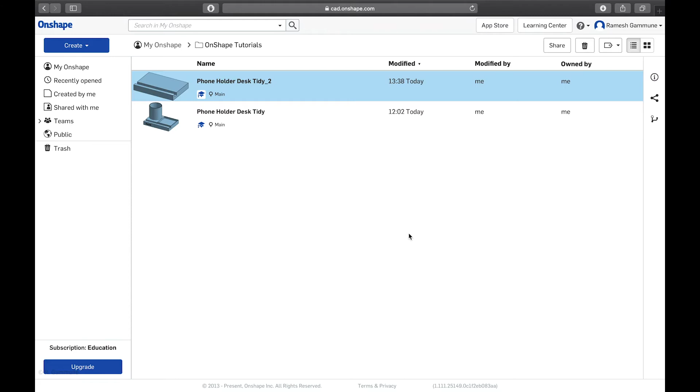Hey guys, welcome to the fourth video on our Onshape Basics series and the second video on the phone holder desk tidy thing. Excuse any background noise, there's a massive storm outside. So last time we made the basic base shape and did a cut. Today we are going to focus on this cutout for paper clips, erasers, USB sticks, or whatever.

We're going to start off by doing a construction line down the middle of this area, and we are going to use a center point rectangle to get that shape. Essentially, it's going to be a 75 mil long one, offset by 2 mil on either end. Okay, let's get that started, shall we?

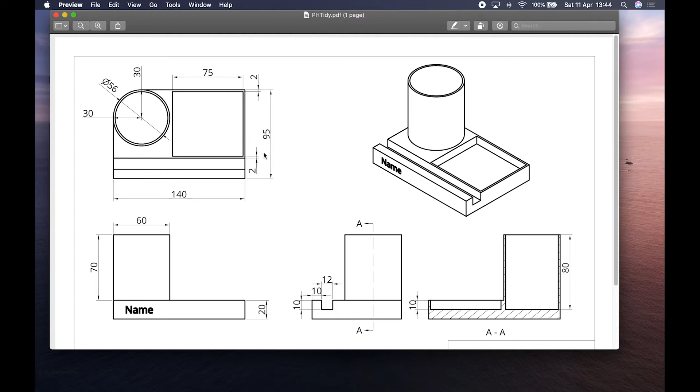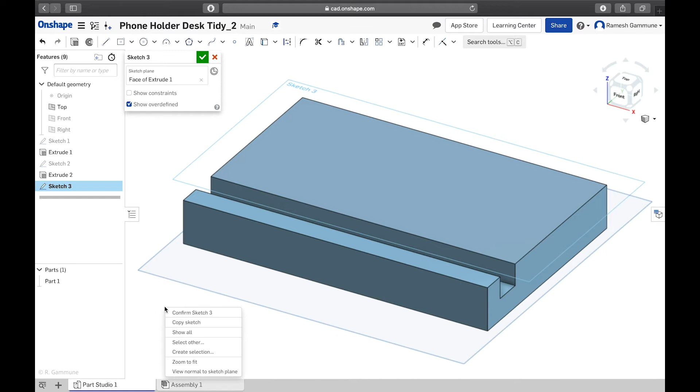So I'm going to go ahead and open my model from the last video. Here we are. We're going to base the sketch off the top surface, not the top plane, the top surface of our model. So sketch, select the sketch plane. There we go. Right click, view normal to sketch plane.

Now I want you to notice that if I highlight this edge here, you can see this dot. That dot is the midpoint of this line, the one that's highlighted. Because we're going to use a center point rectangle, we are going to draw a line off of that in this direction and expand it and dimension it like so. That line has to be a construction line because we don't want our extrude function to recognize it - we just want this for our benefit only.

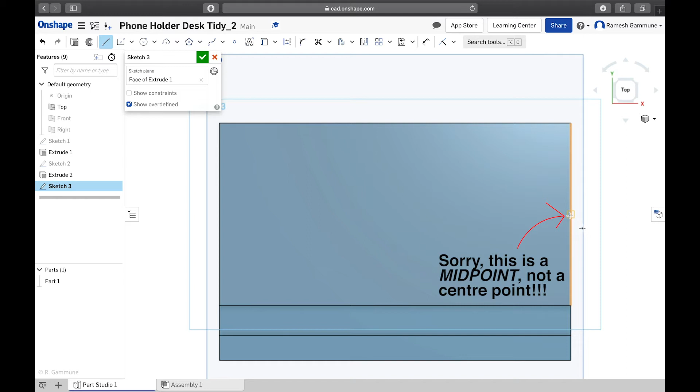So I'm going to go ahead and select line, which is next to the center point rectangle or rectangle, whatever you've used last, and hover it over that edge until we get that box around the midpoint and this little line dot icon. I'm going to click, and if I just move it, you'll see that it snaps to the horizontal, and when it does that, there's another horizontal line below it. So I'm gonna make it about that long, hit escape and get off it.

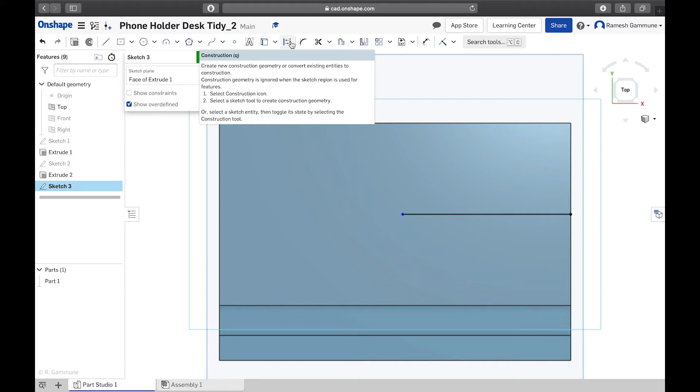Now you're going to go up here next to that letter A. You're going to see another project one, and next to that you've got this straight line with two arrows pointing to and from a dotted line. That is your construction line. Read the text box that comes up, but we want to essentially convert this into a construction line. So I'm going to click the line first and then click construction, and you can see that it just broke it up into a dotted line. Now to get out of this, you actually have to just click somewhere else. There we go, that's our construction line.

Now you can see that this dot over here is blue, which means it's not defined, so we can click and drag that around. Let's make it about that long, and click the blue dot, go up to here - these are our sort of limits. We can lock our points up in space, more or less, so I'm going to go ahead and click fix. That'll convert this to a black dot, and you'll see that you can't move it anymore. Right, that's the first thing.

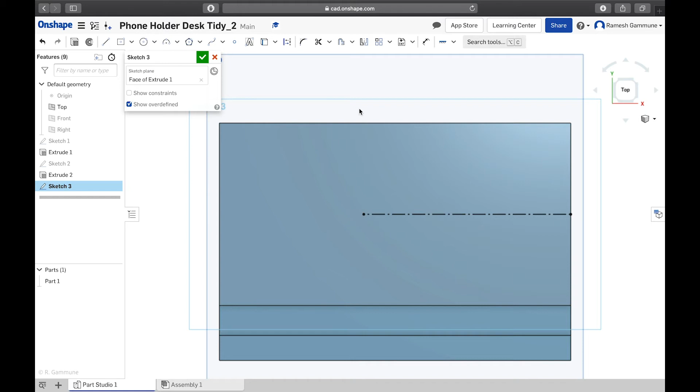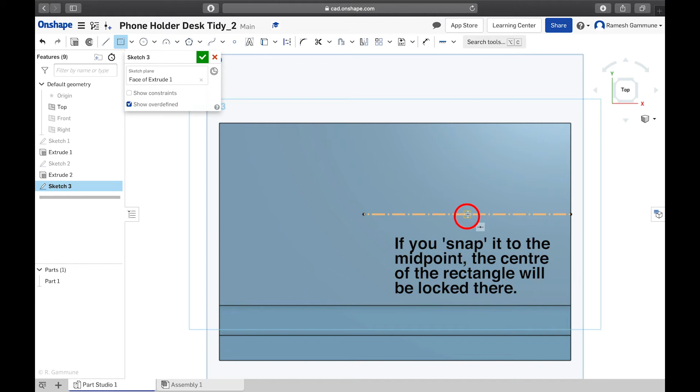Now the next thing I want to do is to make this rectangle. So you're going to use the center point rectangle, and I'm going to base the center along this line, but not on the center of that line - if you click it there, it's gonna constrain it, so you can't move it anywhere after that. So I'm just gonna move it around maybe here, just draw a basic box, whatever shape and size, doesn't matter. Escape to get out of that, and now let's define it.

So we've got 2 mil from that top edge and 2 mil from the bottom edge, and one side's given as a 75 mil length. Let's do the length first. I'm going to click on our dimension tool that we learned in the last video, long end, and 75, enter. Okay.

Before I do anything else, I'm going to move this rectangle to the inside, so that if I dimension that at 2 mil, it's not going to do 2 mil on the outside. It'll make sense in a bit. So I'm going to do this 2 mil over here, 2 millimeters up there, enter. Don't need to worry about the bottom one here because it's a center point rectangle, which means that distance is equal to that always, so it doesn't matter. And here is 2 millimeters as well.

There we go. Now you can see that entire rectangle is black, which means it's defined. That thing is not moving anywhere. Okay, go ahead and get out of the sketch.

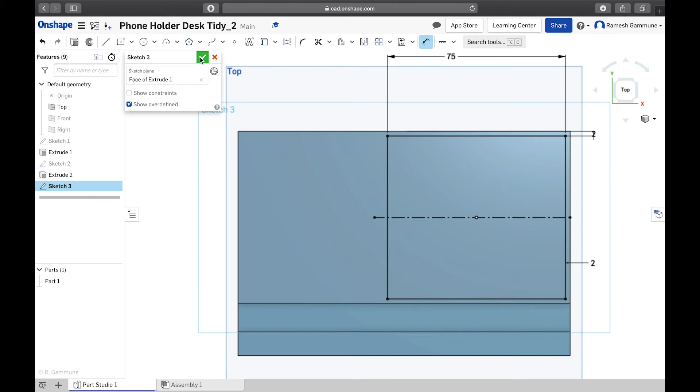So as you can see, we can't really split this into two because there's a construction line there, and that's not going to be recognized by our 3D functions. So we have to extrude this down, cut it down to a depth of 10 mil. So extrude, click, change the direction, remove, 10 mil, enter. There you go. Done. So that's that for now.

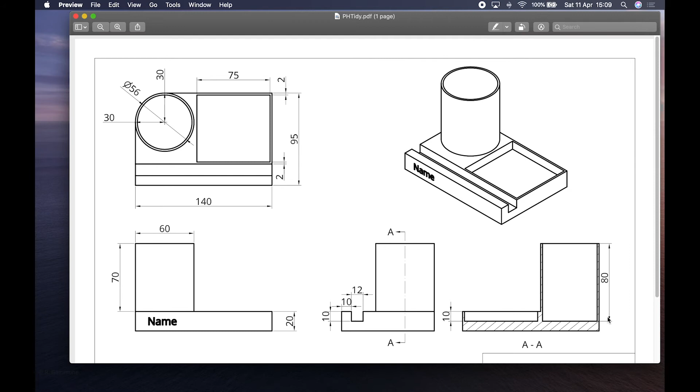Okay, so once that's done, we are going to go ahead and make our cylinder area for the pens and things to go in. That's going to be done in two functions. First, we are going to draw a circle on that area here, and we're going to extrude it up, creating a solid cylinder. Next video, I'm going to show you how to draw a smaller circle in here and cut down to a depth of 80. So let's go ahead and draw it first.

So we're going to go on sketch. We're going to sketch on the top surface still because we're still working on that surface. Click. There we go. Face. Make sure it's correct. Right click, view normal to sketch plane. Don't worry, this will orient itself either way, as long as you're looking straight down on it, it's fine.

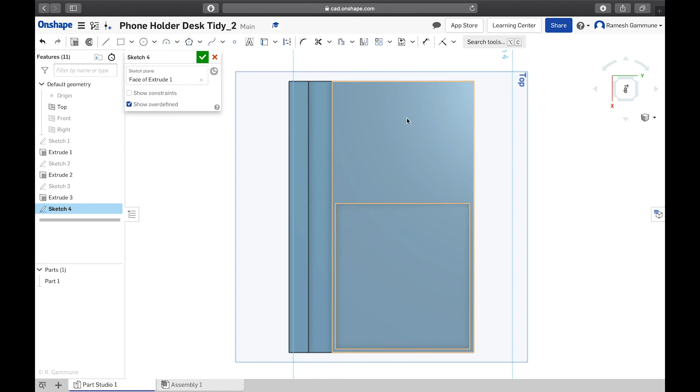And we're going to quickly draw a circle here, and we're going to place it 30 mil from this edge and 30 mil from that edge, the center of the circle, and the circle is going to have a diameter of 60 millimeters, so that each of these edges are tangential to the circle, which means they're just touching that circle at a point.

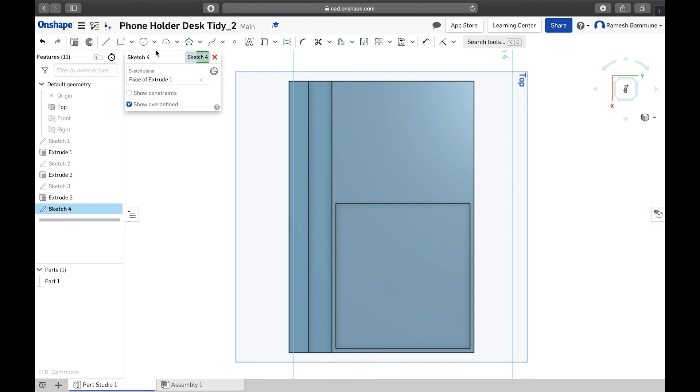I'm going to do that using the center point circle again. I'm going to click, make a circle smaller than the area, just making sure it doesn't go out. I think there's no problem with it going out this time, but it's just good practice to make it smaller than the actual size you want, so it'll always expand when you dimension it.

Now this center point, if I pick it and hold it, I can move the whole circle around. We want to lock it 30 mil from each edge, using the dimension tool. Click the center, then click one edge, and mark that as 30 millimeters. We did this edge now. We're going to dimension and hold that edge, call that 30 millimeters as well. Now that center of the circle is 30 mil from each of these edges.

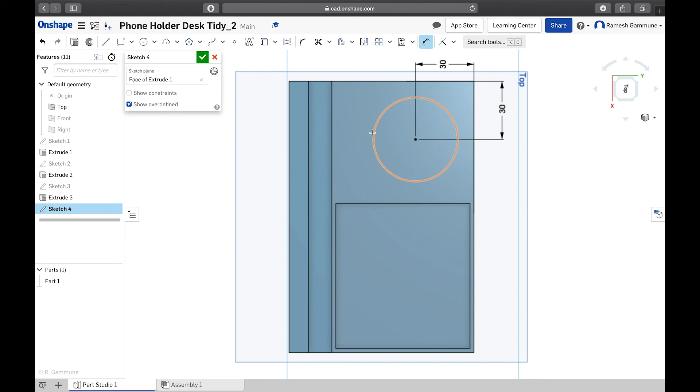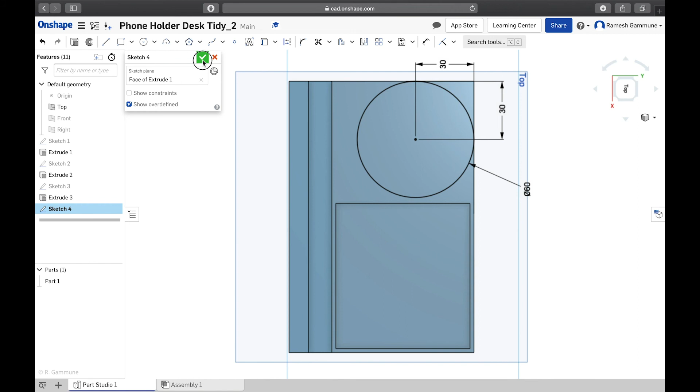And still in the dimension tool, I'm going to set the diameter of this circle to 60 millimeters. There we go, hit escape to get out of the dimension tool. Done. As you can see, we've got this circle touching these edges. Go ahead and confirm the sketch. Now we're going to extrude a circle up to a height of 70 millimeters.

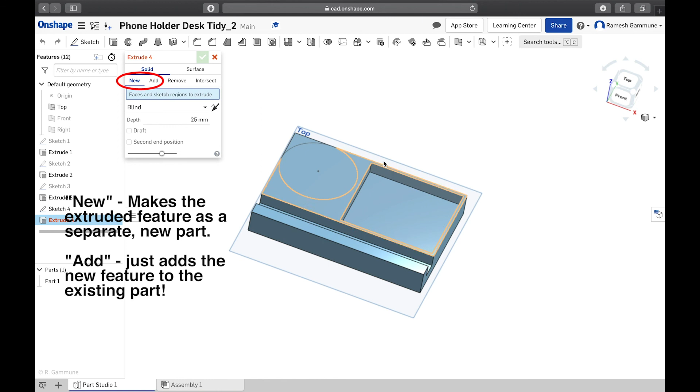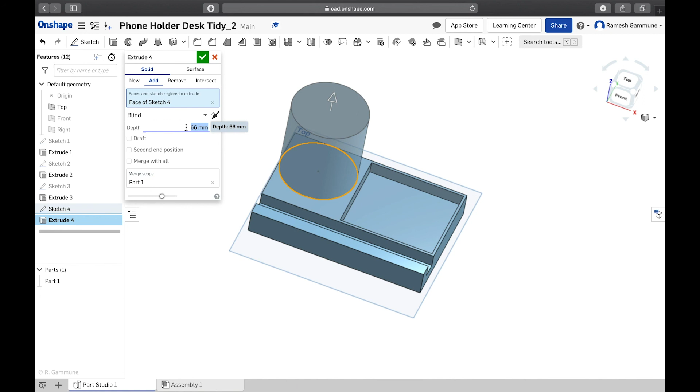Just as we did with the boxes. Alright, extrude. Now, we are adding to our existing body here, we are not adding a new part, so we're going to go to add, not remove, we're adding. Solid surface, faces to extrude, it's this one over here. Alright, gonna go ahead and click that. You can pull this up, whatever, to whatever height you want, or the easiest and most accurate way is to type in 66, hit enter, make sure it looks good, and that's what you want.

Go ahead and confirm the feature, and we will leave that for today. Well done, guys, one step closer to having a finished desk tidy. Alright, so next week, I'm going to cut a hole in here, and we'll cut this part out as well.